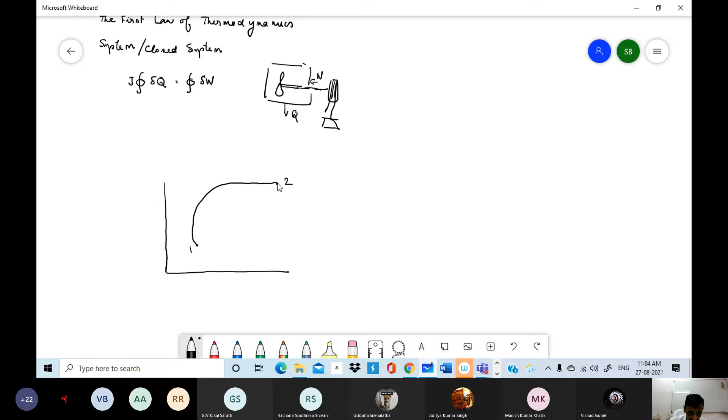So from this, we'll try to deduce a certain quantity which we'll show is a thermodynamic function. So let us consider a point 1 and a point 2. And let's say I go from point 1 to point 2 following a path A.

And then from 2 to 1, I come back following two different paths, B and C. B and C could be any arbitrary paths; the only requirement is that it should start from state 2 and finally reach state 1. In that case, one possible cycle is the system goes through path A and returns through path B. The alternative cycle is it goes through path A and returns through path C instead. So A and B together or A and C together both constitute a cycle, so the first law of thermodynamics should be applicable to both possibilities.

So if I consider A and B, what I have is integral of delta Q is equal to integral of delta W if it goes in a cycle. So for the first cycle, this would be 1 to 2. Again for A and C, it would be... sorry.

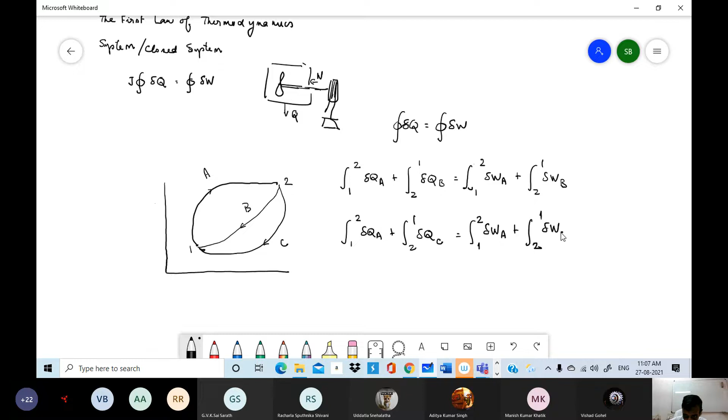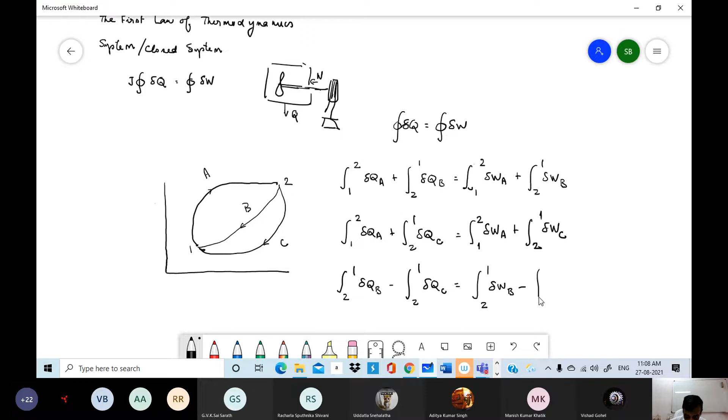Then if I subtract the first equation from the second equation, or okay, let me subtract the second from the first, then I would have... Now let me bring all the B's to one side and take all the C's to the other side. So then I have...

Now when I drew this diagram, I said that B or C could be any arbitrary path as long as it starts from 2 and reaches 1. Therefore, for any two arbitrary paths B and C, this integral of delta Q minus integral of delta W seems to have the same value. For B and C it is the same, and B and C are any arbitrary paths. So whatever other path I take, I could use the same logic and show again that it gives you the same value.

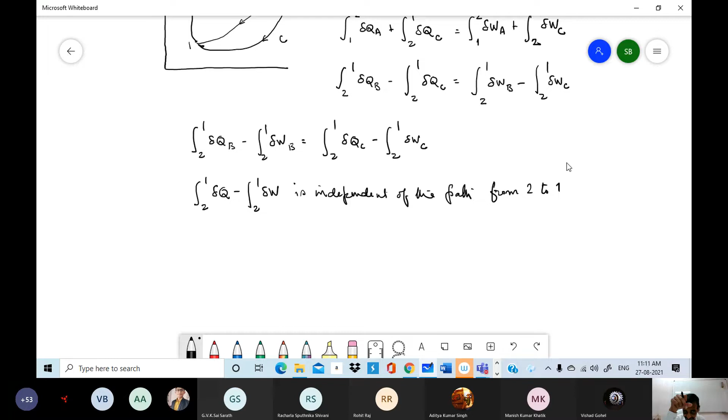So then there must be some function of the point. I could arbitrarily define a function of the point 1 to have a certain value, and then if I know the integral of delta Q minus integral of delta W, that difference I could take to be the difference in a thermodynamic property between 1 and 2.

So what is the physical significance of that difference? What I'm taking is, between two arbitrary points, integral of delta Q minus integral of delta W. So what does this represent physically?

So if it is 1 to 2, it is Q added between state 1 and 2 and W. So how much energy has been added as Q between these 2 points, and how much energy has been taken out as W between these 2 points? So that should give you the net increase in the energy of the system, because you have added this much, from that you are deducting how much you have taken out. So that difference must have remained with the system.

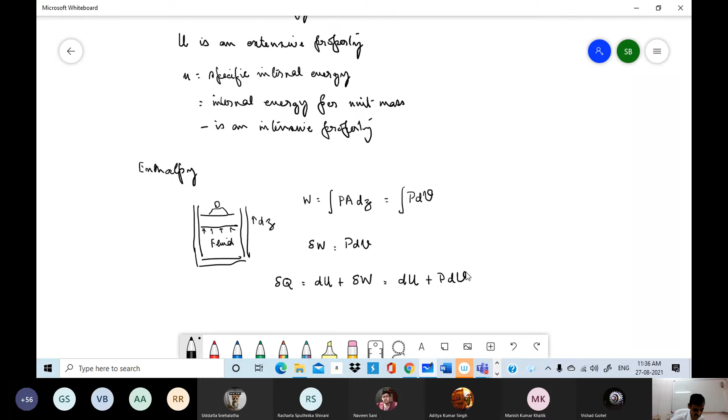We have assumed that changes in kinetic and potential energy can be neglected. If the fluid is there in the cylinder, it's at rest when it is in equilibrium. So kinetic energy can be taken to be zero. As the piston moves up, there's a slight change in potential energy. We assume that that can be ignored. So then, instead of dE, we have written only dU.

But when we integrate, it will be some finite quantity for potential energy. Yes, it is a finite quantity. It will be non-zero. But if you calculate the magnitude, usually the thermal energy is of much larger magnitude than the potential energy. So I'm just giving you a hand-waving argument.

What I would suggest, assuming a certain amount of gas, why don't you do the calculation? It should turn out that the change in potential energy is small compared to the change in thermal energy. So why don't you do that exercise and see what it gives you? In case it doesn't, then we'll discuss it. Okay.

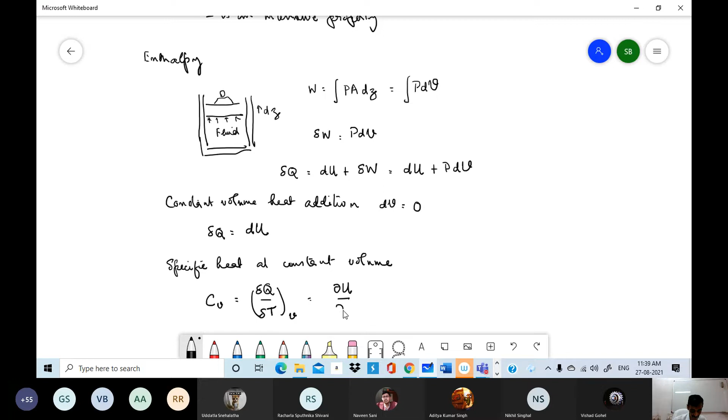So the capital C_V denotes it for the entire gas, and small c_v would be... so I've divided the capital U by the M. That gives me small u. So the specific heat is the partial derivative of the specific internal energy with respect to temperature at constant volume.

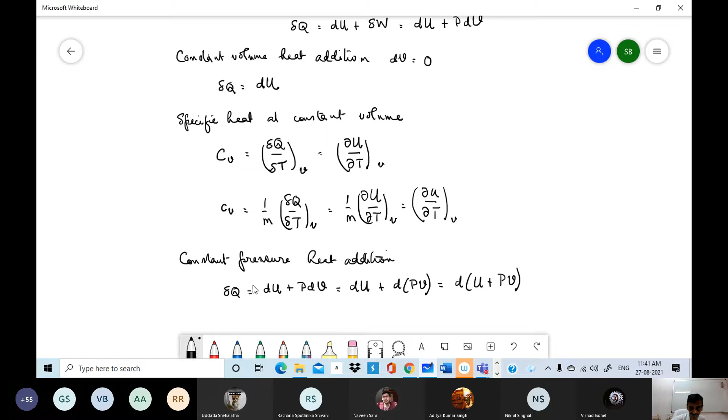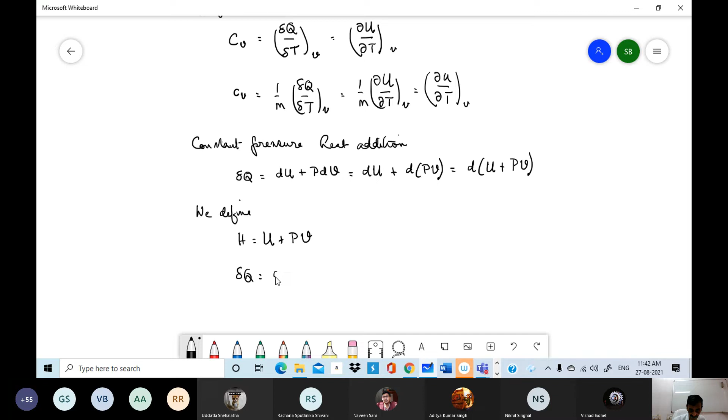Now, since the pressure is constant, I can write this as... so then we define... so this is the definition of enthalpy. So for a constant pressure process, we found that delta Q is dH.

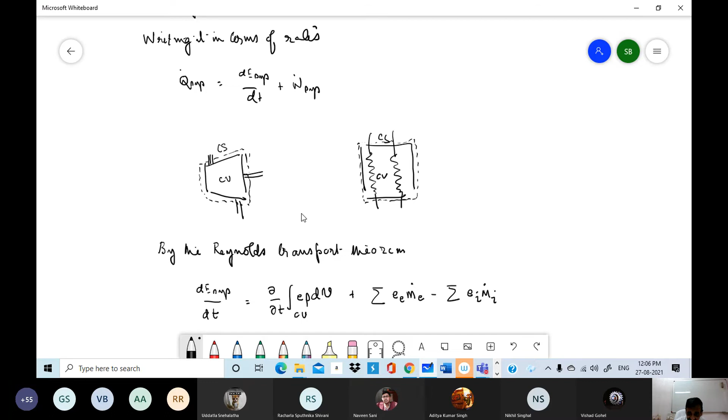My system, by definition, consists of a certain mass of material. It encloses a certain mass of material. So my system boundary at any instant of time may be somewhere here. If I consider at time t, my system boundary is over here. Now, the W dot sys is the total work done by that amount of material in the system. Now, that does work in many ways.

One way is the work which it does on the shaft, which is extracted as energy from the shaft, which is used for driving the generator. So this is a turbine connected to a generator. The fluid pushes against the vanes of the turbine. As a consequence, it does work on the turbine blades. That work is transferred through the shaft to the generator.

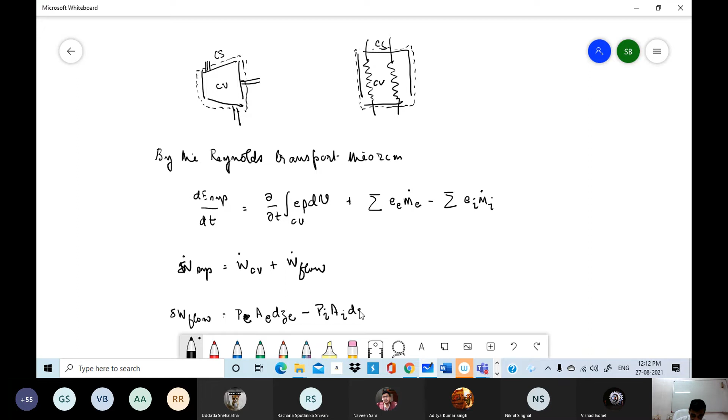Now AE into DZE is the volume, the extra volume covered in time delta t. So this I can write as PE... okay, maybe I didn't really require this step. I can directly write AE DZE is VE into delta t.

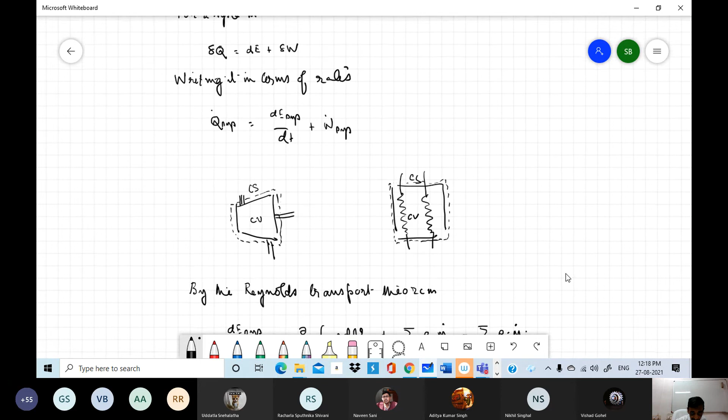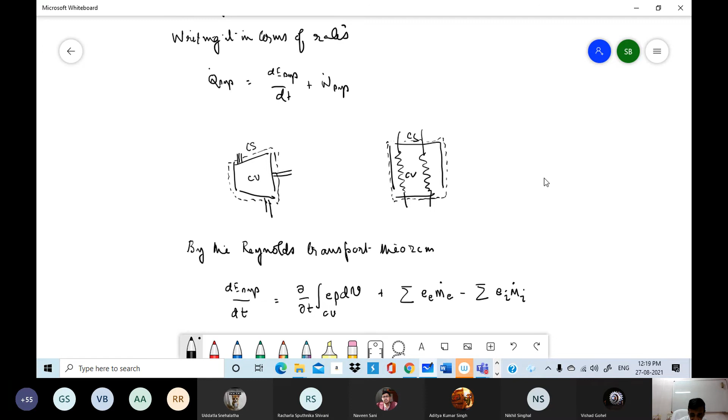Okay. So we know this for a system. Now the dE system by dt we have written in terms of control volume using the Reynolds transport theorem. The W dot sys is W dot CV plus W dot flow. So the W dot CV is the work done by the fluid inside this volume. Inside this volume, it exerts a force on the impeller blades, and that does some work. So that is the work in the control volume.

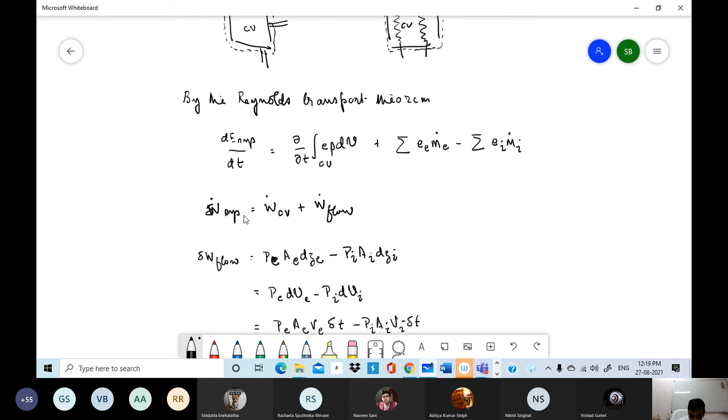Sometimes it is denoted as W dot shaft, and you have a W dot flow, which doesn't actually come out as useful work. So that is why we make this distinction, that this W dot CV is the useful work which we get from the system, and this is what is naturally done at the inlet and exit. So then W dot system is this. W dot flow, we have an expression. So I can write... sorry.

And the Q dot system. So why did we make this distinction for W? Because the work done at the boundaries doesn't come out as useful work. So that's why we ignore that. Now the Q dot to the system, whatever Q supplied is what you have to pay for. So then there doesn't seem to be any distinction between the Q dot for the system and Q dot for the control volume. So I write this as Q dot control volume. So then I had

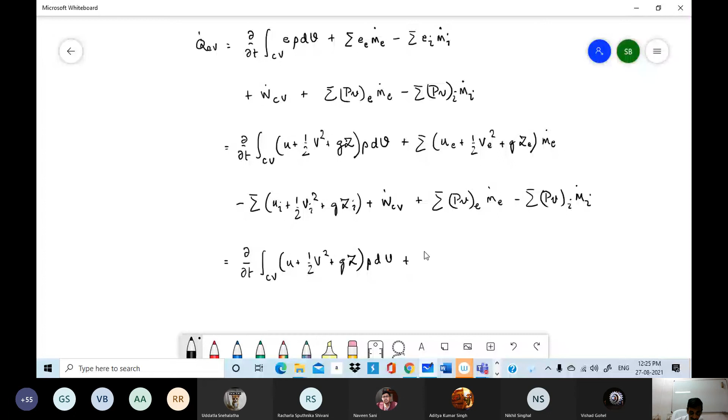Now if I combine this with this, I have... so then this I have written down, this I have combined with this, then I am left with... now if I look at these expressions, I find that I have this combination U plus PV. Now that we know is equal to H.

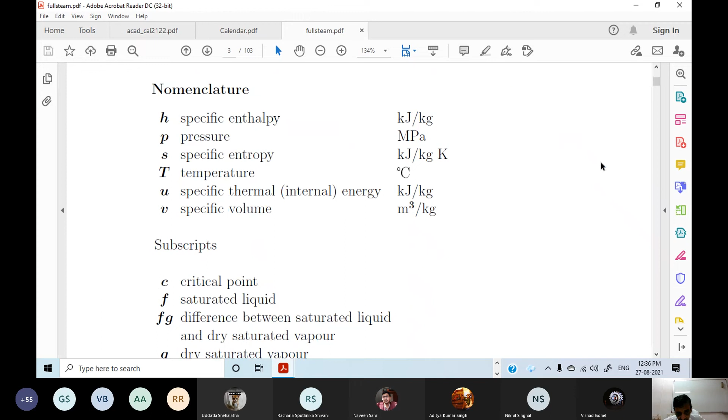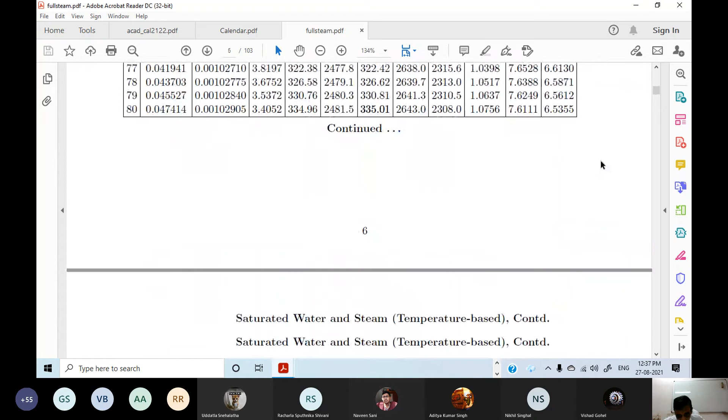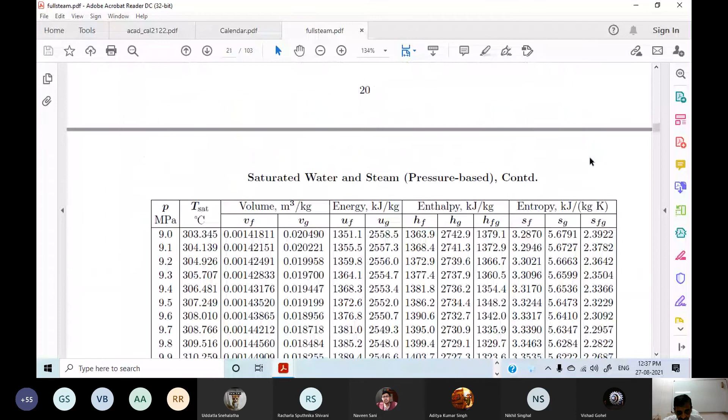Okay, so this is that same table which I showed you last time and which I've emailed to you. In the beginning it has the saturation part where you have a mixture of vapor and liquid, so questions of how much liquid, how much vapor would arise. So let's go to a simpler part, the compressed water and superheated steam part. So water subcooled and steam superheated. If we go back to our earlier problem, we had steam at 20 megapascal and 600 degrees centigrade.

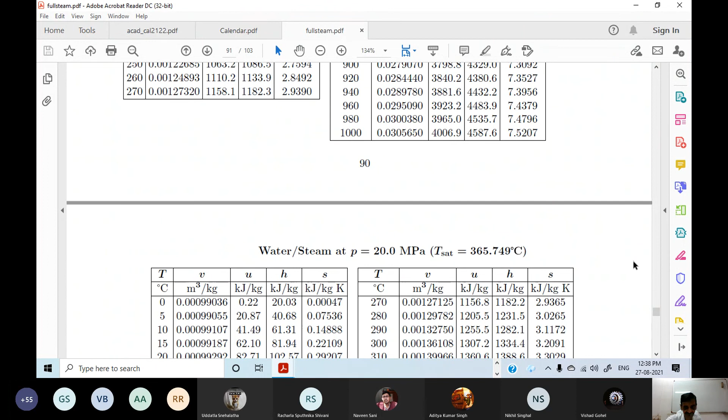So this is 20 megapascal and it's at 600 degrees centigrade, which we had seen as superheated steam. So for this value of pressure, properties are tabulated for various temperatures. Last time we wanted only the specific volume, so we read off that value from the second column. Now let's see the further columns. The next column is U and the column after that is H.

So if I go to 600 degrees centigrade, then the U and the H are 3175.3 and 3539.0, and the units are energy per unit mass. Internal energy is energy per unit mass, so that has to be in kilojoule per kg. So if we want to apply first law, then for steam, this is where we can get the values from.

Now, say you are dealing with a power plant. In a power plant, typically you have a pump which raises the pressure of water from atmospheric pressure to a higher pressure. Then at that higher pressure, it is sent to a boiler. Q is added to it by burning fuel, so it reaches a higher temperature. And then that steam at higher temperature and higher pressure is sent to a turbine where it undergoes expansion.

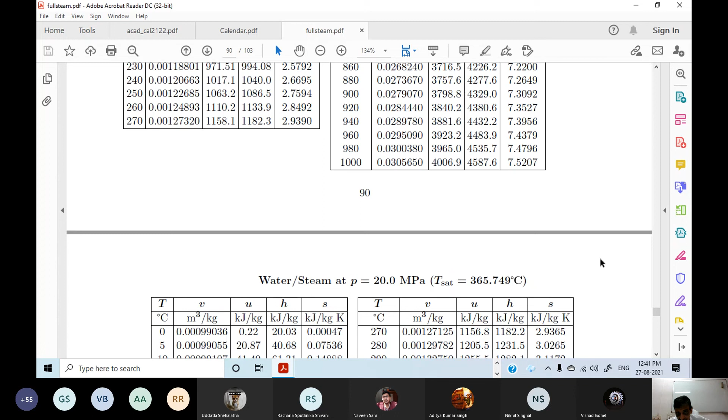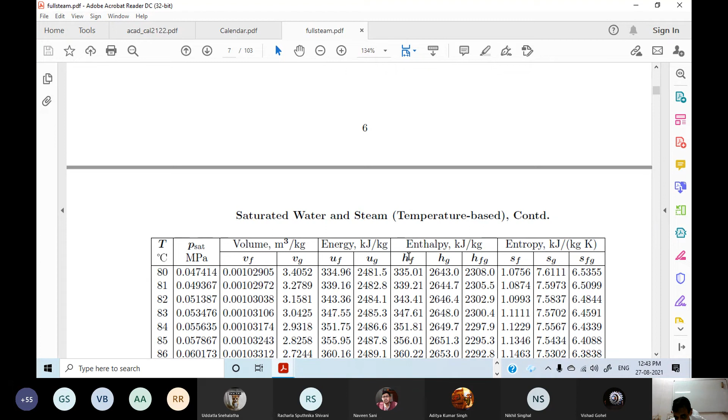Now, coming to the temperature-based saturation properties, saturated water and steam. Depending on the pressure, water will boil at a certain temperature. Let's say the pressure has been determined such that water boils at this temperature. Then we are given two values for both specific internal energy and specific enthalpy, one for the liquid and the other for the vapor. UF is for the liquid and UG is for the vapor. Similarly, HF is for the liquid and HG is for the vapor.

In fact, there's one more property given, HFG, which is by how much HG exceeds HF. So if I subtract HF from HG, from this 2600 something I deduct 300 something, it will give me 2300. So HFG is the difference of these.

Now the question comes: inside the boiler, if I want to do an analysis, at some point I may have a mixture of liquid and vapor flowing. If I'm in the superheated region, I have only vapor. If I'm in the subcooled region, I have only liquid. What if I am in a situation where the phase change is occurring? Then I have a mixture of liquid and vapor. So given a mixture of liquid and vapor, how do I determine the enthalpy?

So if I want to apply first law to a control volume where, at the inlet and exit, what is flowing across is not pure liquid or pure vapor but a mixture of liquid and vapor, how do I determine the enthalpy at the inlet or the exit?

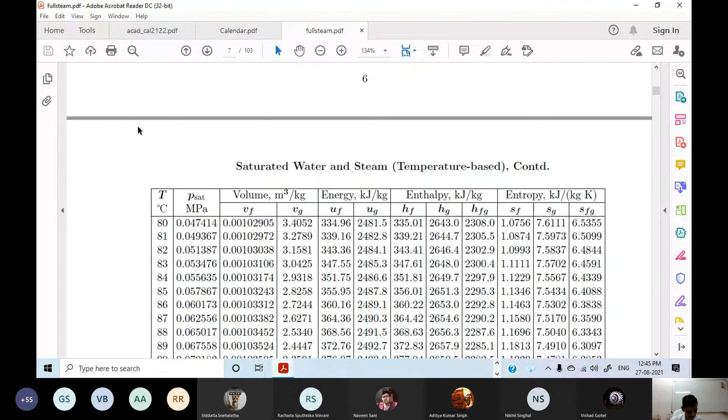So we had defined the quality, which is denoted by X. This is the fraction of mass which is in the vapor state. So now let me reason out what is the specific internal energy of a mixture of liquid and vapor.